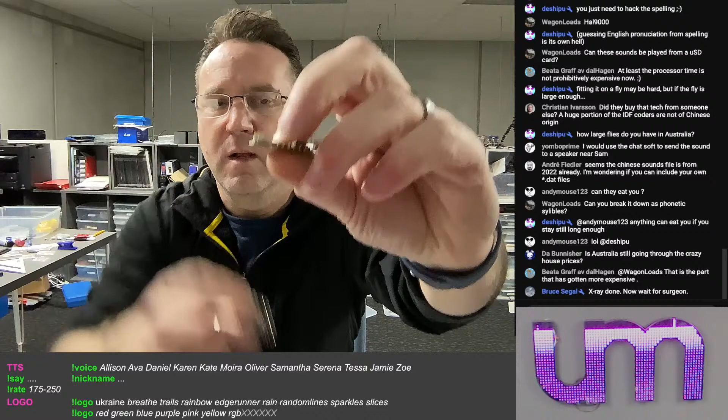I was thinking, what if I could find a cable supplier that will make me cables going from a Pico-EZmate, a 2-pin Pico-EZmate connector with 1mm pitch, to the JST, or to the Pico blade. Is there more than one size battery?

Well, JST is a brand. We call it a JST connector, but that's wrong. It's a JST PH. The one on the Feather is called a PH, it's a 2mm pitch. This Pico blade is a Molex, not a JST connector, and it's a 1.25mm pitch.

No, I don't want to make cables. I'll source the cables.

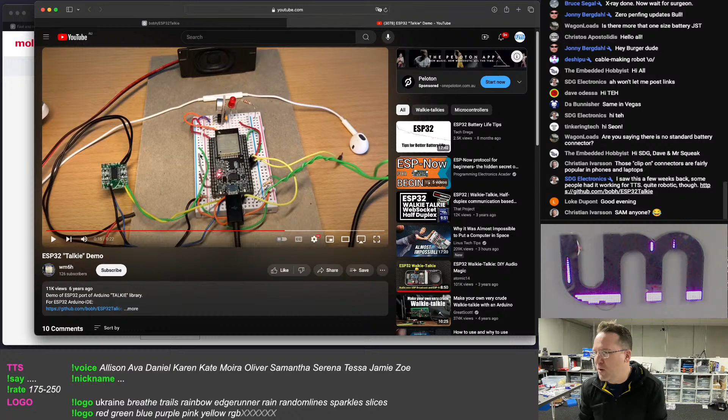So that's right, that's the speak and spell stuff. Audio output.

Oh, it's not using I2S. Well, that's a problem. Does it require the DAC?

Okay, yeah. Well, you can't do that on an S3 because there's no DAC. I need something that'll do I2S.

Oh well, you have a speak and spell? Really, I never had one. I was jealous of people that did when I was a kid, but at the end of the day, I had a Commodore 64 and I could make Sam talk. That was cool.

Dick talk even, I heard somewhere. So anyway, those are my options.

I've been looking at connectors. I found housing for these on LCSC, but I can't find the other ends, which means I can't use their cable system to find out.

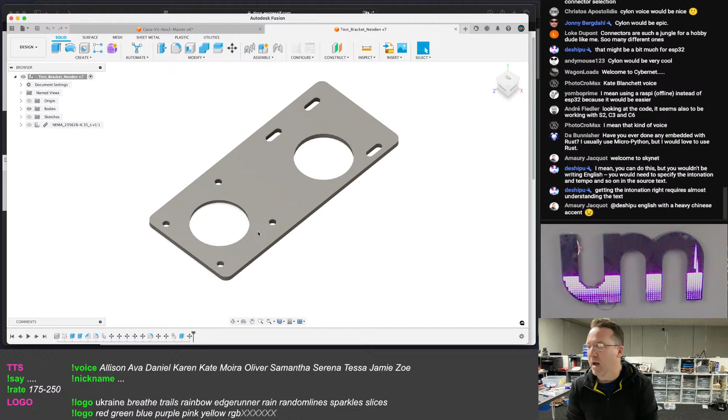Da Bunnisher says, have you ever done embedded with Rust?

No, I'm not interested in Rust. I suffer through C++ as it is. I'd rather not be coding in C++. I definitely don't want to be coding in Rust, embedded or not. So yeah, and I don't want to be coding at all, as many of you know.

Are we going to do a poll, or am I just going to start doing something? Or is there something else you guys want me to work on? Honestly, my plans fell through for my stream at 8 o'clock last night. That's when they fell through. Actually, it was about 9 o'clock they fell through. And it completely threw me, and now I have no idea what to work on.

Are you doing each spoken word needs to be recorded? Not word, each phrase. It doesn't matter, it doesn't matter. I'm not looking for a solution, folks. The solution is... Christian Ivarsson says the train says choo choo.

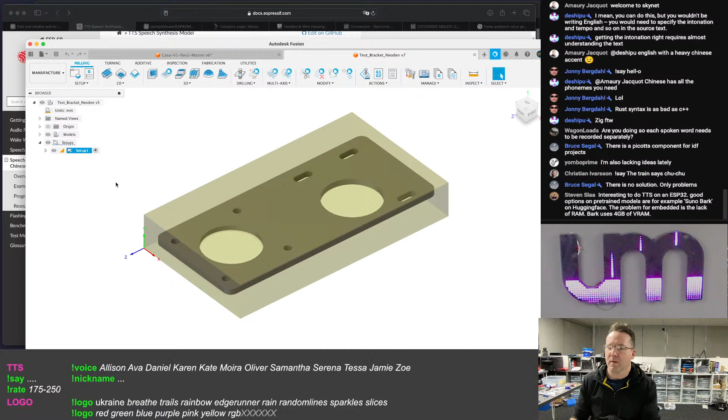Interesting to do TTS on an ESP32, good options on pre-trained models, for example. Hey Steven, what are pre-trained models for text-to-speech are you talking about? What do the models run on?

But anyway, none of that stuff's going to work on an ESP32. I mean, for the ESP32, it's going to have to be something specific. It won't be a...

Anyway, yeah, I don't want to do it by AI. Yeah, I know it's not. Yeah, none of the stuff's going to be embedded, and it'll be a large model. But that's not what I'm looking for. I'm not looking for that type of setup. I'm looking for something for embedded, which means it's something that's going to be coded, not generated off a model type thing. Does that make sense?

Like it wouldn't be using frameworks with models. It would be literally coded at the lowest level.

That's that question, Wagon Loads, is an incorrect question. That's like saying, can the ESP32 do red? AI isn't a thing, it doesn't exist. Okay, a rubber band is AI, like, you know what I mean? Like AI, you've got to be specific, not 'can AI', because AI isn't the thing that runs.

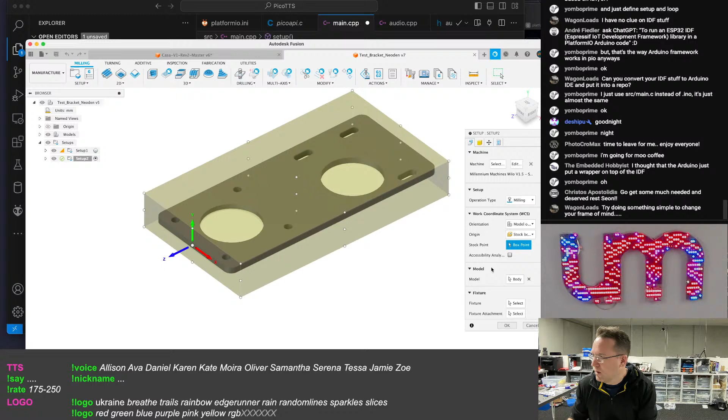Let's do some toolpaths. Or let's not, I don't know, we'll see. Let's start off with... why is my work holding not...

What? Delete. New setup. Okay, orientation.

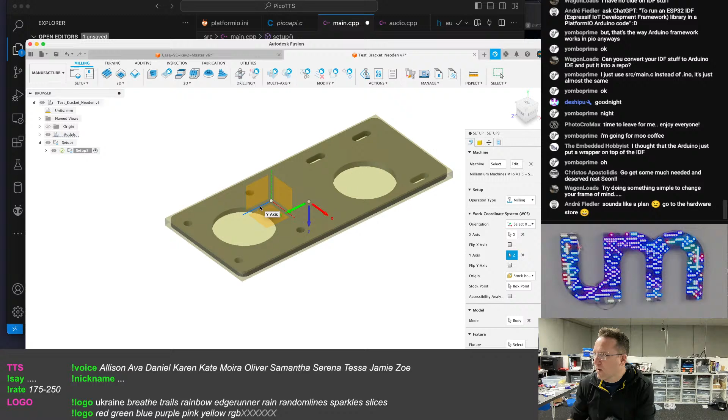Select the X and Y. Select the X, that is the X. Select the Y, that is the Y. And the Y needs to be flipped. There we go.

Oh, that's assuming I'm holding it that way. Which way am I going to hold it? No, I might have to go that way, actually.

Select the X. That's going to be my X. What? Select the X. Select the Y. Why is that not? I want this way to be my X-axis. What is it doing?

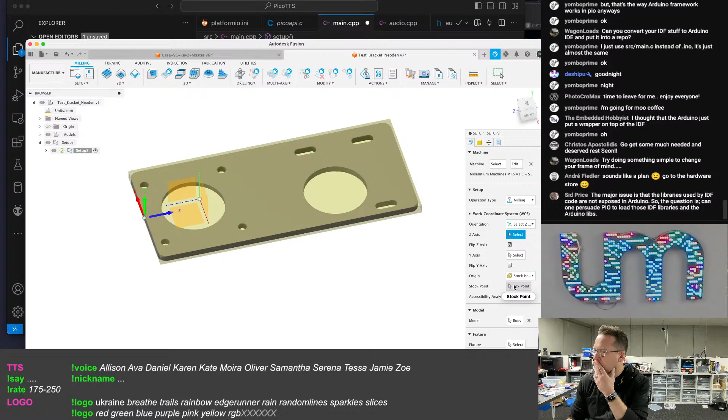Select the X and Y axis. X-axis, oh I'm clicking that instead of this. Right, X-axis is that, but flipped. And my Y-axis is that. No, my Y-axis is...

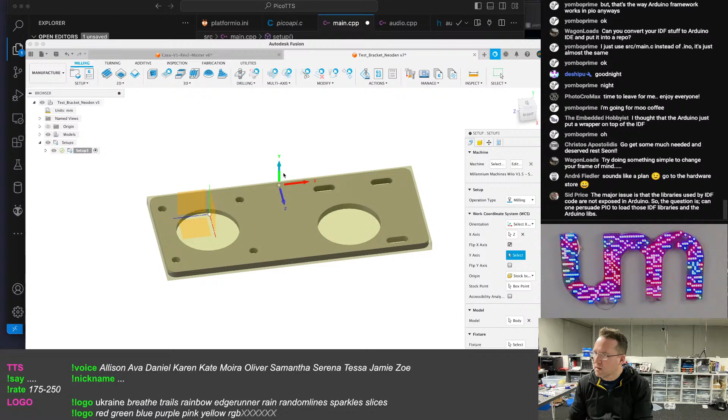Select my X. Did I click? I must have clicked the thing. Okay. And my Y-axis is that one, flipped. Thank you.

Major issues: the libraries used by IDF code are not exposed in Arduino. So the question is, can you persuade PIO to load those IDF libraries? Yeah, I don't know, I don't even know where they'd sit in the project.

Sid, that's the thing. Okay, and then my origin is going to be a selected point. Okay, that's going to be my origin.

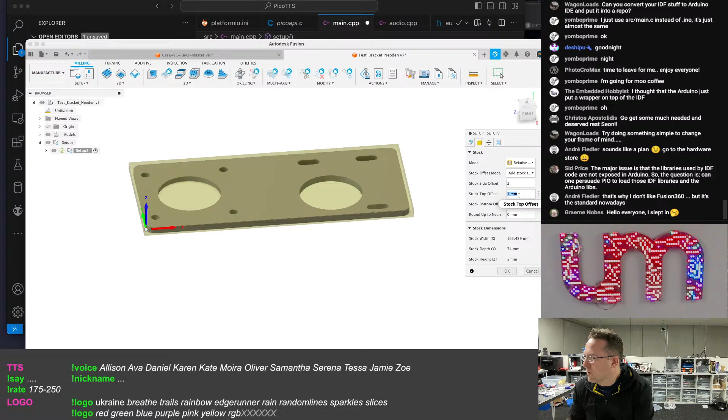And extra stock, I don't know how big I'm going to make the thing, and stock offset is 0. Top and bottom. Okay.

Which means I need my origin to be... how do I... oh, my origin, oh can't I do it on the stock box point there? Okay.

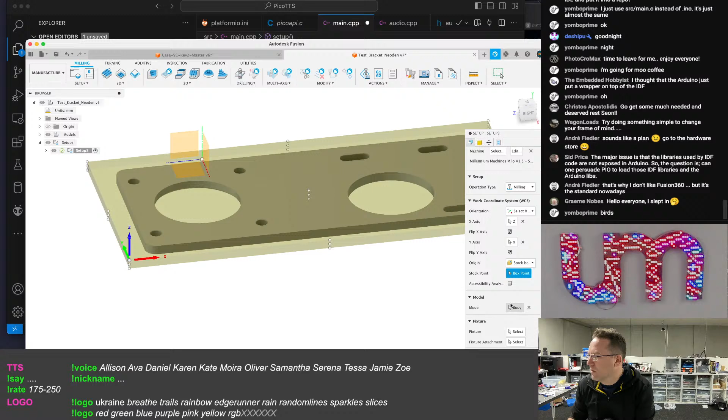Hey Graeme, how you doing mate? How's everything going?

Okay, so I want to do a bore, and it's going to be a flat end. I need a 4mm... who knows? I'll play around with those later.

Things a lot more, but Fusion is more powerful. I've never used anything other than Fusion. All the examples for the Milo stuff that I've seen has all been Fusion.

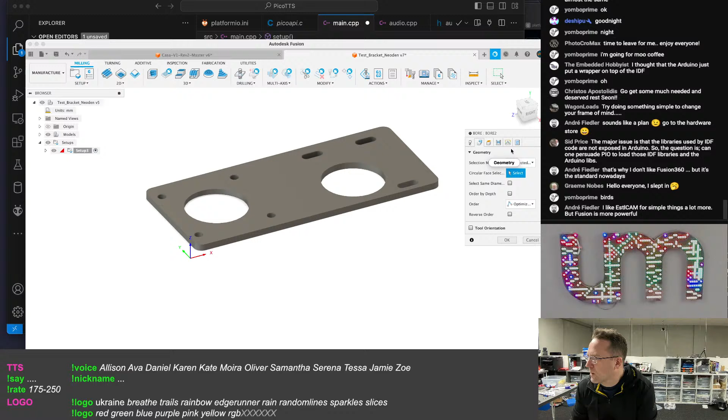No coolant, I don't care about the feeds and everything else right now. Geometry. So I'll do that one.

So my options for those, these are 5.2 millimeter. I could do a 5.2 millimeter drill. But I feel like, oh can I do it? Is that a slot?

So can I do these as a bore as well? I guess I could.

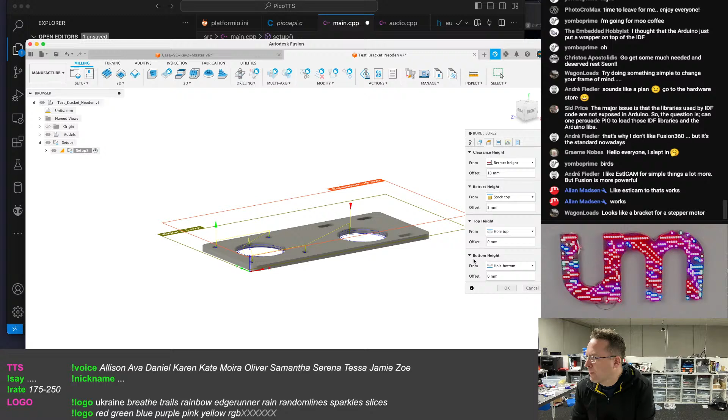Stock bottom. And it's actually got to go a bit further. Offset 0.5, no, minus 0.5 millimeters. So...

Oh, doesn't it cut out the whole way? If I do a bore, that's got to not be a bore, that's got to be a... maybe that just needs to be adaptive clearing.

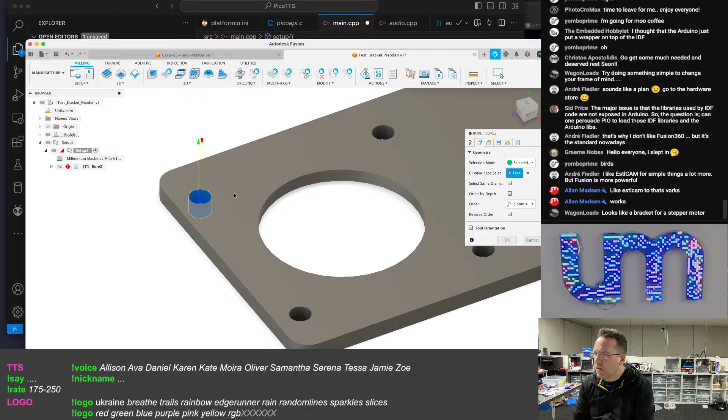See, I don't know what I'm doing, by the way, in case you all didn't know. That one. Okay. So this should slow it down.

Why is that going up? I want it to go down, bore down. Yes, this is for my conveyors, which I need to do out of aluminium, 4mm thick aluminium, which is on the way, but I don't have it yet.

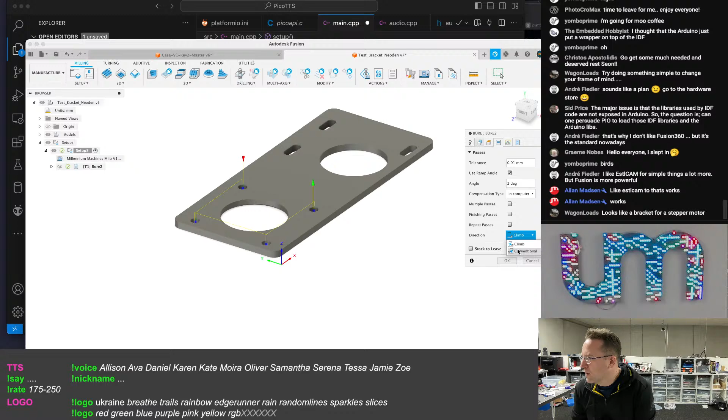Direction, maybe because it needs to be conventional. No, it's still... why would it be going up? I would assume it would go down, drill down. Is Peter around? See, I don't know what I'm doing.

Okay, let's cancel, let's forget about that for the moment. Let's do another one, we're going to do an adaptive clearing. That's going to be the same one.

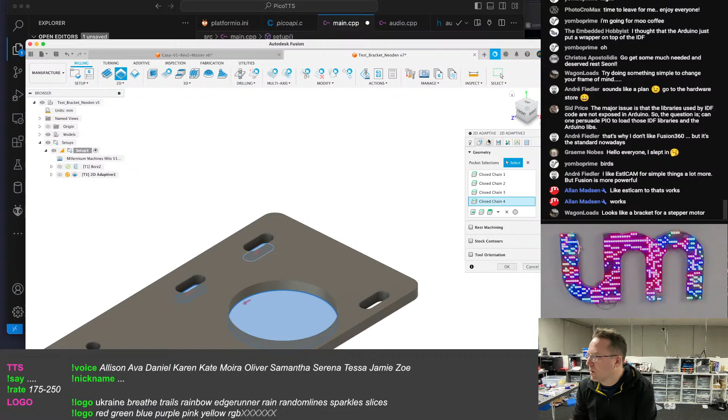And the geometry is that and that. I wonder if I can do those. And again, I'm going to not worry about... bottom is going to be stock bottom.

Spindle speed smaller than supported for this machine. Allan Madsen says the top of the plate is 0, and you are going from 0 to minus 4 millimeters. Right, so I want it to go from 0 to minus 4, not minus 4 to 0. Oh, right.

Okay, so that looks like... you see that it's going backwards.

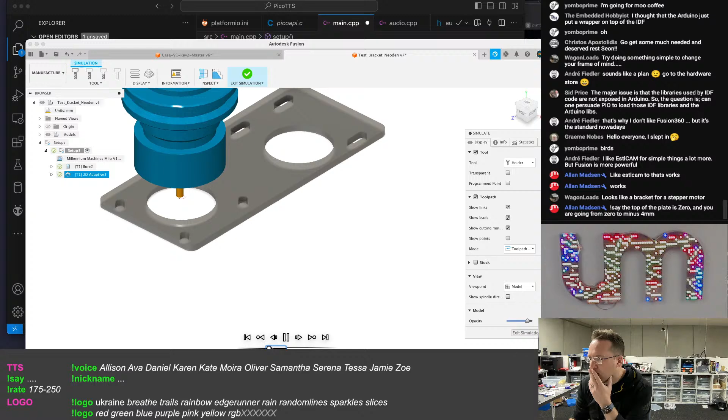Oh no, it's not. Oh, is that minus speed? I'm an idiot. So that works. I must have had it set to minus speed, so it was going backwards. How funny. Simulate. Play. That's better. Slow it down. Okay, not that slow. See, now it's going down. It was playing the simulation backwards.

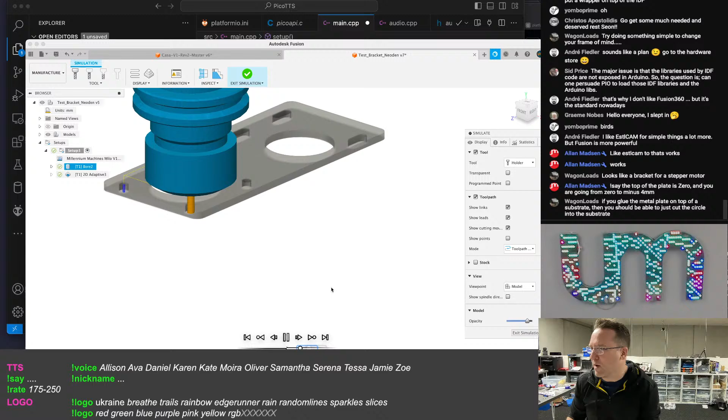If you glue the metal plate on top of a substrate. What? Yeah, I don't want to, I want to clamp it. Well, what I want to do is cut the outside edge out. I don't know how to work that one out yet. Okay, so that's working.

The question is, can I also add... Oh right, I did add that one, and that one. But they're not being done as part of it. So it doesn't like doing adaptive clearing on the slots. So what would I use for the slots? See, it's skipping the slots.

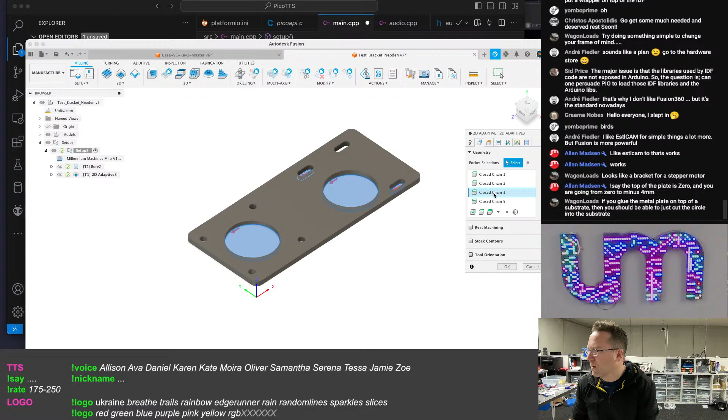So what would I use? Am I slotting the line of the slots? Is it a slot I want?

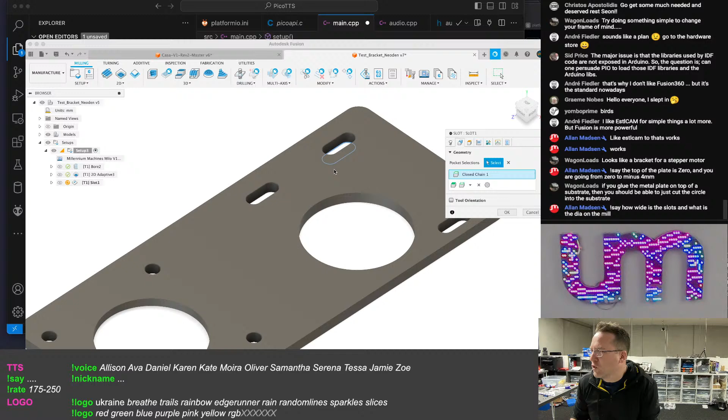Allan Madsen says, how wide is the slot and what is the dia on the mill? So it's a 5.2mm width slot and it's a 4mm end mill. I thought I could do a bore with it, but apparently not. I'm going to try doing a...

What does that do? Oh, that might... is that what I want? That seemed a bit fast. Let me just slow it down so I can see what it was doing. Okay, that might work.

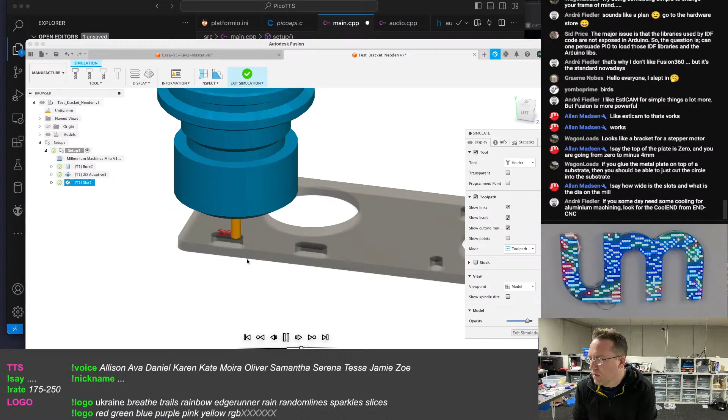So is that... but that's not going wide enough. That's going back and forwards. But that bit is not wide enough for there. So it's not a slot. I don't want a slot.

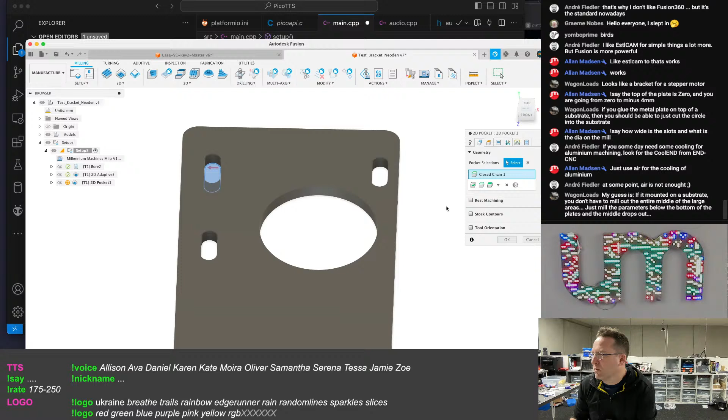Delete. Is it a pocket? Looks like it's doing the same thing. It's got no X and Y. Oh, actually it does, look, it is moving side to side.

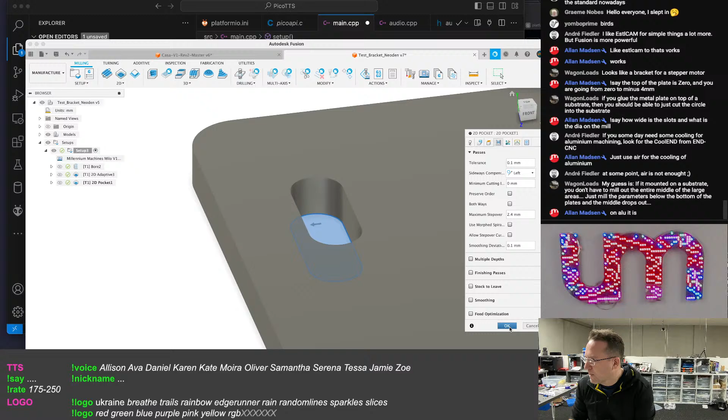But it looks like I've left clearance on it. So that's something I need to fix. Where's the clearance? Right, here, stock to leave. I don't want to leave any stock. So maybe the slot, oh, that's better. Look at that. Maybe the slot would have worked.

So do I do the same thing here? Did I leave stock to leave? I did. I don't want to leave it. I'm not going to do a finishing pass on it. It doesn't make any sense to have a finishing pass.

So the big question I've got, the one thing I haven't been able to work out how to do yet... right, so that will do all my cuts.

The question is, how do I... Geek says, greetings mortals. Save, gotta save. Hey, Quixotic Geek.

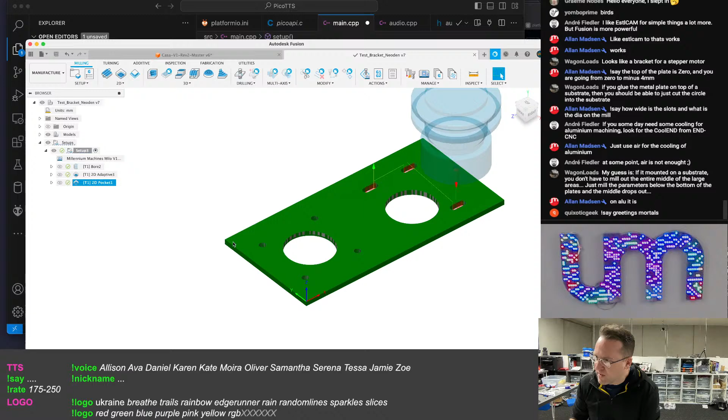How do I do the outside edge and leave tabs? So this is the outside, that's my piece, right? I want to cut around this, but leave tabs. So is that a contour? Oh, tabs. Wait. Oh. Tab width 4mm.

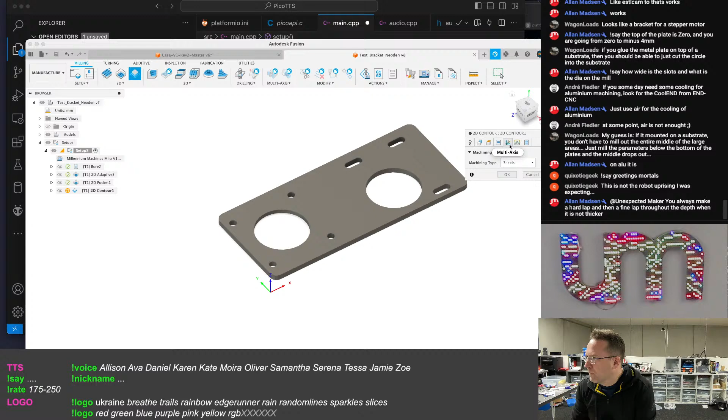Okay, just let me see what this does. Stock bottom minus 0.5. No stock to leave. Like, I'm not setting up any of the feeds or rates or anything, right? I just want to see if I can get a list of cuts. That looks promising.

Although that's dropped down way too much. So I need that to cut down. And why can't I actually see the tabs? I'm not sure if... oh, right. That's cool.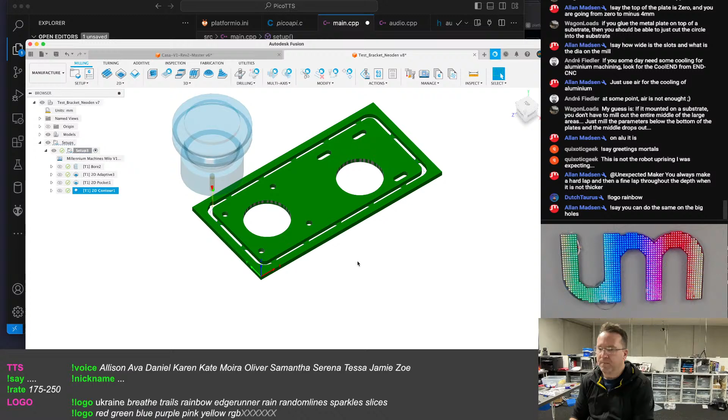I know I'd have to cut them and break them, but this way I could put it in the vise and I wouldn't have to clamp it, but maybe I could clamp it. You could always make a rough pass and then a fine pass throughout the depth, then when it's not thicker. Sure. Allan Madsen says you can do the same on the big holes.

The thing is, yeah, so I know I need to play with, like for this adaptive clearing, I need to play with the optimal load. Like that's how. No, it's not optimal. What's the one that sets the rate of cutting down? Like, it's only 4mm thick aluminium, but I can't just cut through 4mm in one hit.

But this contour, I don't know what any of these... like I've not... oh, I'm going to, is it multiple depths?

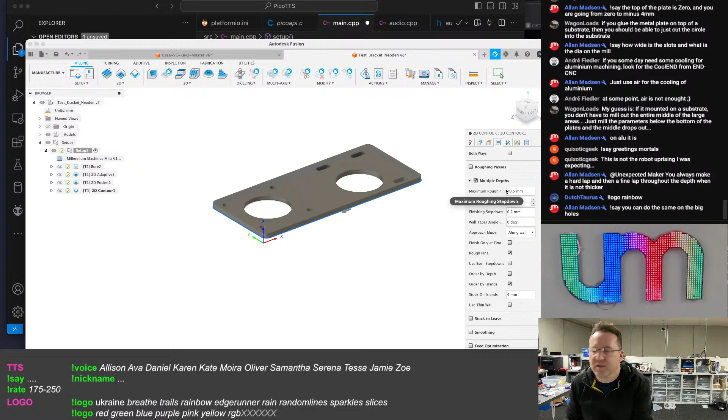Maximum step down, specifies a maximum step down between... oh, you can't even see that on the screen. Hang on. Allan Madsen says, does it have depth steps? That's what I'm looking at now. Here, so it's the maximum step down between Z levels for roughing.

Right, so that's 0.5, which is stupid. So how much do I want to cut at once? Is it 1?

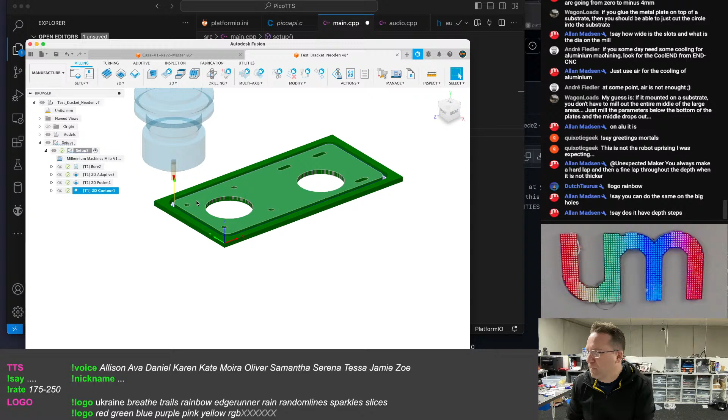Right, so that looks better. That's coming down 1mm at a time. I don't know how fast I can cut it, right?

Okay, so that's cut all that. It's going to be the same with the tabs, to 2mm or 1mm. That would be easy to remove. Sure, but I also don't want it to fall apart.

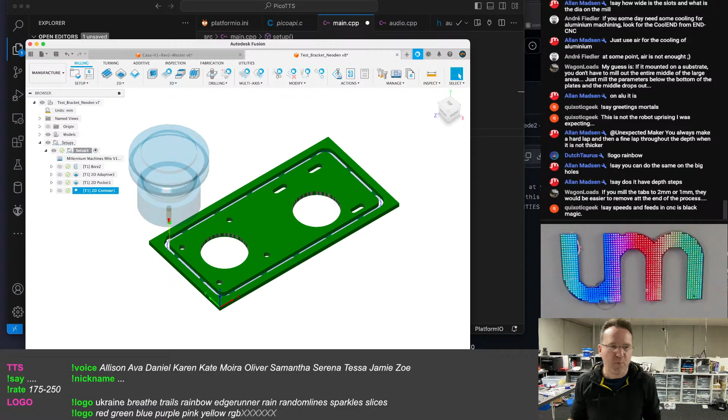Geek says speeds and feeds in CNC is black magic. I know it is, it's like RF. But this is just, I just need to do it, right? I need to try, and if I break bits, I break bits, and if I wreck stock, I wreck stock, you know what I mean?

So with this adaptive, I don't have to do the step down, I don't think, because this does a bore down first, you see? Once it's in, then it starts clearing. But my clearing might be too wide, I need to play with that.

Right, so the question is, are the tabs going to be strong enough to hold it? Most likely not.

But my other option is I need to somehow hold this onto a spoil board, and I don't know how I could hold it onto a spoil board without the clamps being in the way. And I don't want to stick it to a spoil board, and I don't want to cut these holes here and then use them to screw it into spoil board, right?

So option one is make all the internal holes. See, I didn't want to do that. I didn't want to have to stop and change what I'm doing, because I'm learning, and I'm trying to see if I can cut this in multiple steps without having to touch the workpiece in between.

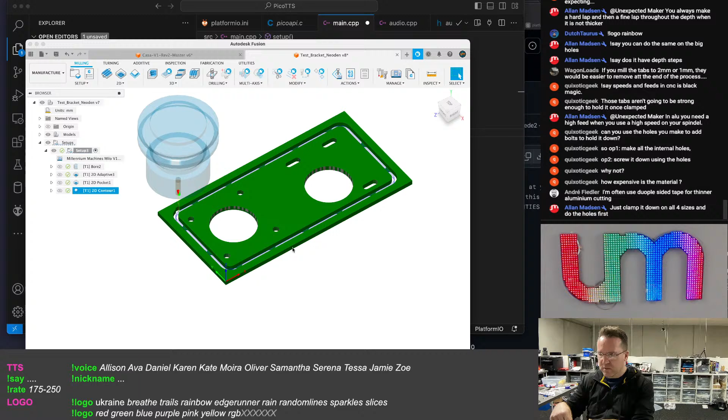It's not about it being expensive, I need to make 3 of these, I've got enough material coming. That's not the point. The point is, if I have to clamp it and cut the holes, or however I hold it and cut the holes, I then have to drill that into spoil board, screw it in, and then have to reset up my work point, recalibrate, just to cut.

Just clamp it down on all 4 sides and do the holes. But the clamps are going to be in the way. How do I clamp the middle section?

Yeah, no need to recalibrate. Not calibrate's the wrong word. I have to, well, what do you mean? How is it sitting there to start with? I don't understand.

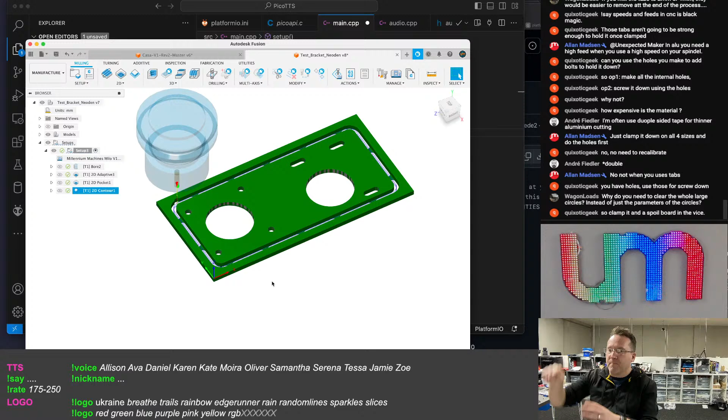But I don't have holes, so I need to drill the holes, I need to mill the holes first. But that's still, okay. So these 4 holes here, 1, 2, 3, 4, and even maybe these slots, I could use those to screw it into some spoil board, but those holes don't exist yet. They are part of the milling process.

So this has to be sitting, either clamped to some spoil board somehow, drilled, and then... Allan Madsen says just clamp it from the side. Let me finish. Mill the holes, and then put screws in to hold it down. But it's been clamped already, so then those clamps have to come off. If I clamp it from the side, then how's that different from the tabs not holding it in place?

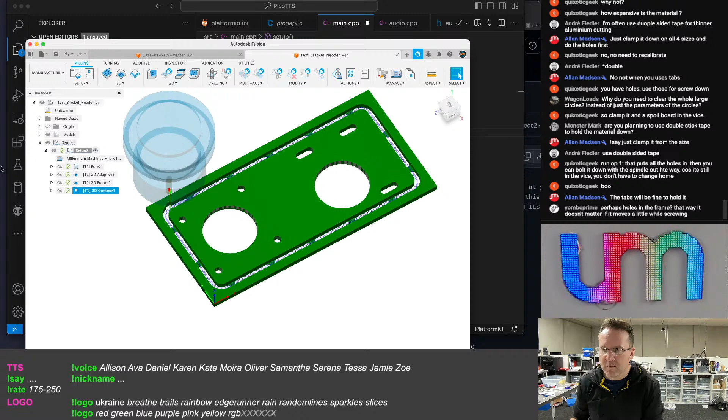Tabs will be fine to hold it. But didn't you or someone say that those tabs won't hold it? So what are the, that's a lot of tabs, is that enough? So if this was clamped in a vise, just hanging in the air with a gap underneath it, right?

Are those tabs enough to hold that in place? No, I don't have it, it's on the way, I'm waiting for it, the material. And I'm trying to come up with a way of cutting this out without changing the end mill. 4mm aluminium.

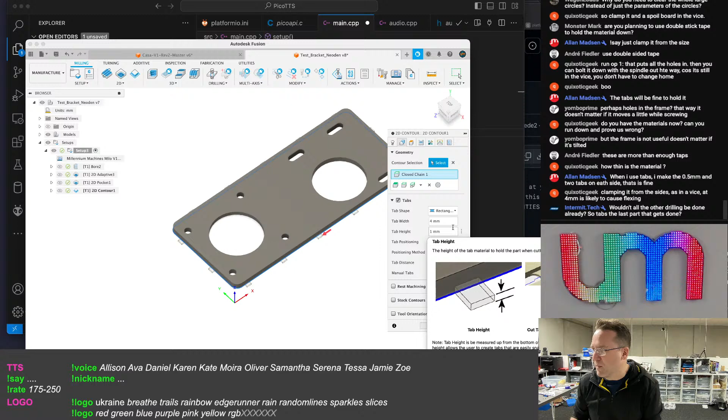Okay, well, where are the tabs? Geometry. So that's 1mm tabs. So you reckon I can go 0.5mm on the tab?

Number of tabs. Oh, I can't do that - if it's 2 there, it's 2 everywhere. Oh, I can select manual tabs. Is 4mm wide tabs okay?

Allan Madsen says, remember how far you go under the plate. 0.5mm under the plate.

No, I don't think it broke. I don't know, did it?

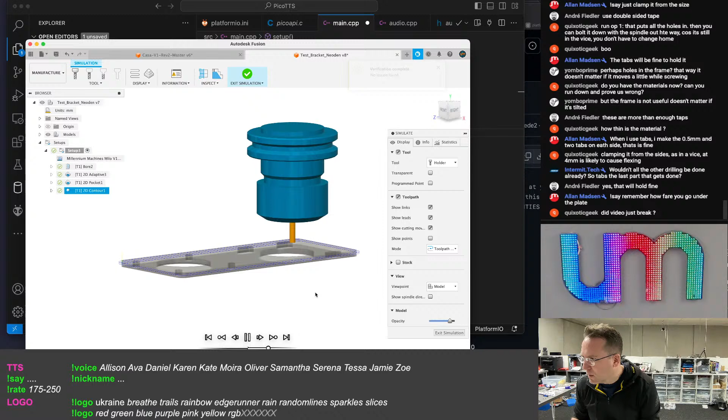Allan Madsen says then make them 1mm. Oh, is that from the very bottom, is it? Ah okay, that makes a difference. That's why they're not there now. Okay, that's why you're saying about how low. Okay, so I'm going 0.5 under.

If I want them to be 0.5, they need to be 1mm. Okay, see, I don't know any of this stuff because I've never done it before. Why is my Discord pinging a lot?

Wait, why has that only got 2 tabs now? Oh, it's per contour. Wasn't it per side? Geek says, what tolerance class are you aiming for? Number of tabs per contour.

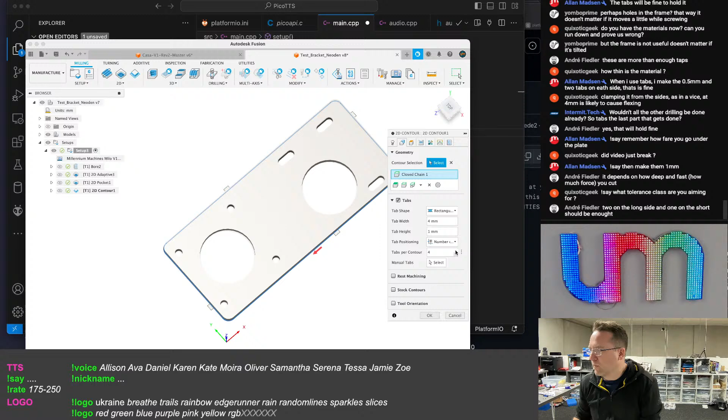So will that be enough? Six - one on each end and two on each side.

What's the tolerance class? Allan Madsen says, I am professionally trained in CNC. I am professionally not trained in CNC.

Okay, that's what I've got there. I don't know, like, so I don't have a tolerance class. Like on this, if it... like I'm not doing a finishing pass close enough. I'm not leaving any stock on the cuts.

Close enough is good enough. I don't care about the finish on the edge, really. Not for this - this is a functional part, and it'd be nice if it looked fantastic, but it is what it is.

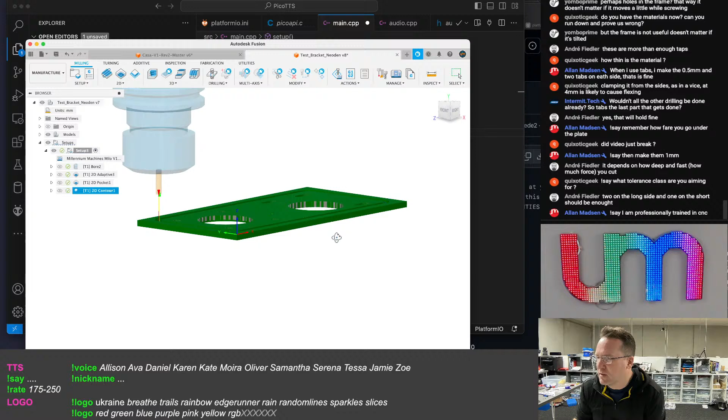So the question is, if this was sitting in a vise clamped on this side and this side, is this gonna break? Are those tabs gonna have a problem because of the holding of the vise pushing? Yeah.

Seriously, my Discord's going crazy.

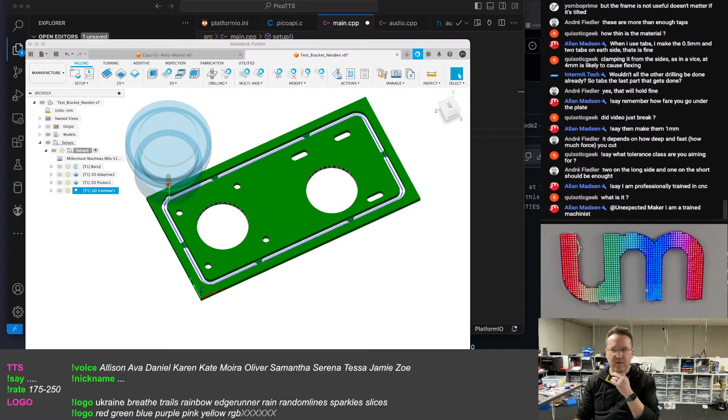Look, this looks like it could work. How do I run the whole... can I do a... oops. No, simulate - will this show me the whole thing?

Yeah, this is for the automating of the conveyors. I'm currently using 3D printed brackets like this. I mean, that looks like it's doing everything I want.

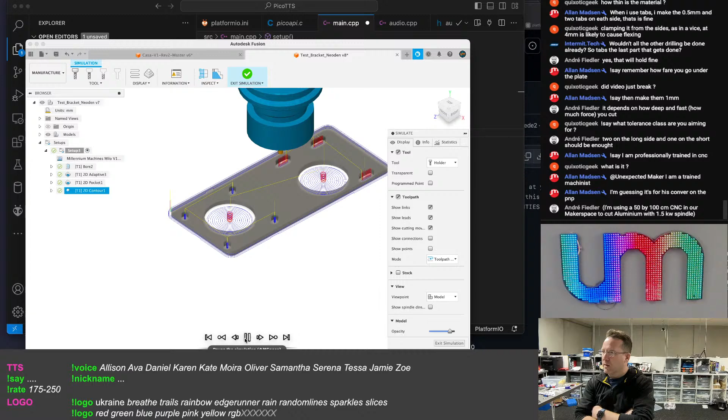I'm just going to go single flute. I've got some 2 and 3 flute end mills on the way.

Well, that's pretty close to what I'm doing here. Can the base plate have a milled out recess that the metal plate can be pressed into to hold it in place? Well, I don't have a base plate. I'd have to design and mill a base plate to do that, but I don't need to.

What I want is to be able to hold this from the sides so there's nothing underneath. I don't want a spoil board. I mean, I could do a spoil board, sure - I could pre-cut a spoil board out of wood, something thin, that's just the same size as my stock, like that.

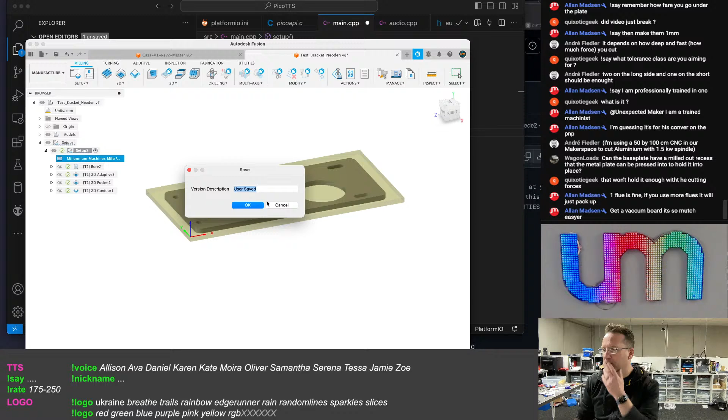Oh, it's not right. So, I mean, that's what I could do, and then at least it's got something to sit on.

Get a vacuum board - yeah, those things are for later. Like, air and mist is for later. Everything right now, I need to finish the case, which I'm getting close.

And I want to be able to do a test cut. I've got some 3mm stock here, but it's not cut to size - I need to cut it down first. It's an odd shape and it won't fit in my vise, it's not square or rectangle, you know what I mean? So I don't really have any tools here to cut it down.

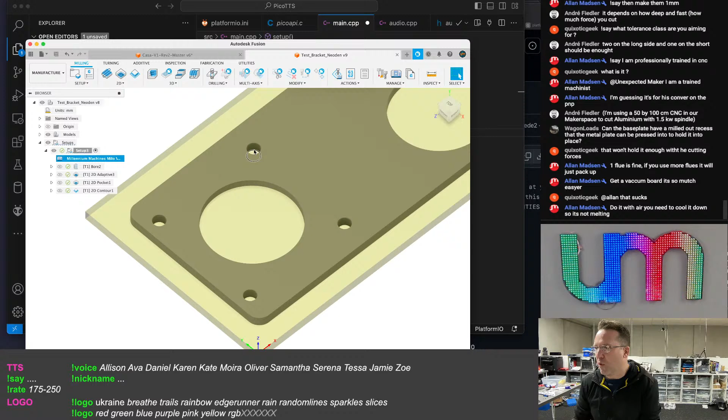So are they the correct operations I've done? Like, I'm doing a bore rather than a drill here because I didn't want to switch bits. So I'm doing a bore on those 4, adaptive on the inners, pockets for these - yeah, pockets for those, and the contour.

I don't have air, so I can't do it with air.

Right, I got to be careful. Yeah, I got to be careful with the bits not ejecting on higher flute count. Yeah.

Yeah, I saw that app. Someone posted on the Millennium Discord about that app, which looks really cool.

There's nothing I can do about this getting hot. I have a compressor, but I've got no way of... I've bought parts to make an air thing, but they're not here, they'll be weeks away still. Then I have to build something that attaches to the side of the spindle mount and have that point down. I don't want to wait 2-3 weeks for that to come and work out how to put it all together and install it before I can do my first cut.

At the end of the day, no, the robot cannot hold the air nozzle in place.

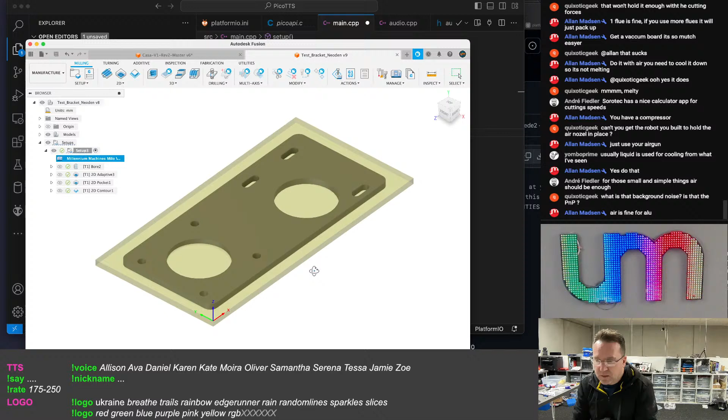No, that's my printer printing. Because I've been printing so much ABS and ASA, the whole printer has got so much dust. I spent like 2 hours the other day cleaning down the whole printer, the carbon rods, the steel rods, the threaded rods, cleaning them with IPA and re-lubing everything. But then I printed another 2 or 3 reels of ABS since then, and because it's a volatile material, this stuff just goes everywhere, so I need to re-clean it all out again. But I'm just waiting for this stuff to finish printing first.

Can the workpiece be mounted in a larger... No, it's not the workpiece that's the issue, it's the bit, it's the end mill. Yeah, it's not the workpiece.

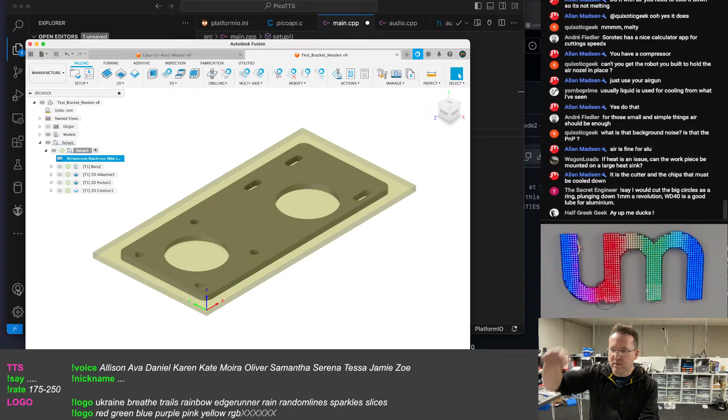The Secret Engineer says I would cut the big circles as a ring, plunging down 1 millimeter a revolution. WD-40 is good for aluminium. What do you mean as a ring? These are going in as an adaptive, so they're going down in the middle first and then cutting around. Like how else would you do it? Or are you talking about just cutting a ring and leaving the center?

The robot's unfinished in my front room because I had to move off it for a bit and build my mill. I spent the last couple of weeks building my mill, which is built and working, and I'm just finishing up building the enclosure for it right now.

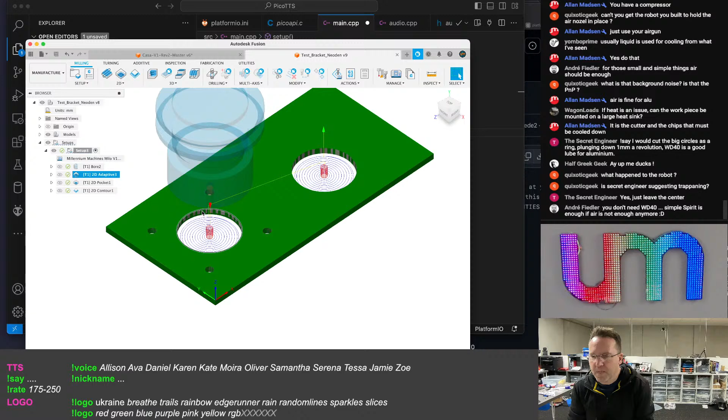I don't know what trepanning is, but if I leave it, the center's not going to be held down. So what's going to happen to it when I'm cutting it? Where does it go? At some point, as the cut's finishing, it's just going to fly off somewhere, right? That's not what I want.

Very confused. The last Aussie machinist video I watched was making their own files. Making their own file, doing what? As in their own toolpath files. I'm not doing that.

Hello, half Greek geek. It's like a 3,000-year journey.

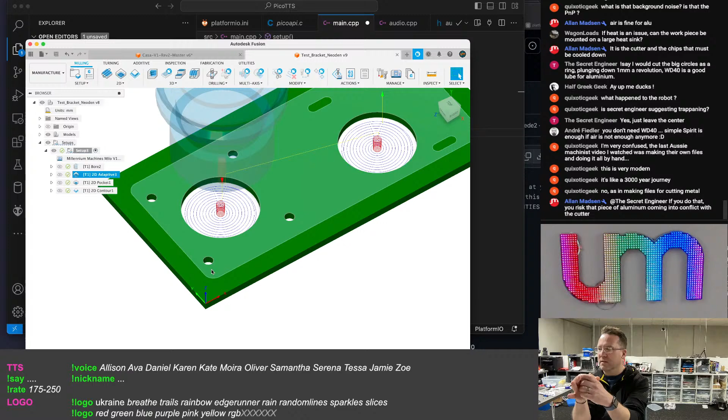If you do that, you risk the piece of aluminium coming into conflict with the cutter. Yeah, I don't understand what would happen to that hole, to the disc. I'm pretty sure this stepping is way too much. My optimal load... is it optimal mode? What's my cutting radius?

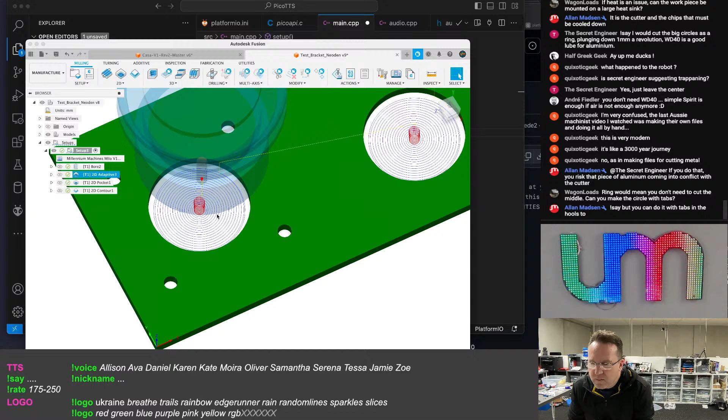If it's a 4mm... Allan Madsen says you can do it with tabs, yeah, in that one, holes too. Yeah, but then I've got to somehow get them out and clean them. I need to somehow break it out, and then file and clean the insides. I'd rather not do that.

Here you go, this will do it slower. My stepping, I think, was too much before.

I don't care how long it takes to cut them, I'm not making hundreds or thousands of them. I don't care how long it takes to cut, other than the end mill being hot for a long time. They need to be round, there are steppers mounting on them, so those holes have to fit the guide on the stepper. So they're going to be accurate, or hopefully be accurate.

If you're clamping from the side, then you may not have a flat surface because it will bow under pressure. Which way will it bow? You're talking about the material bowing this way, because of the pressure from the clamp?

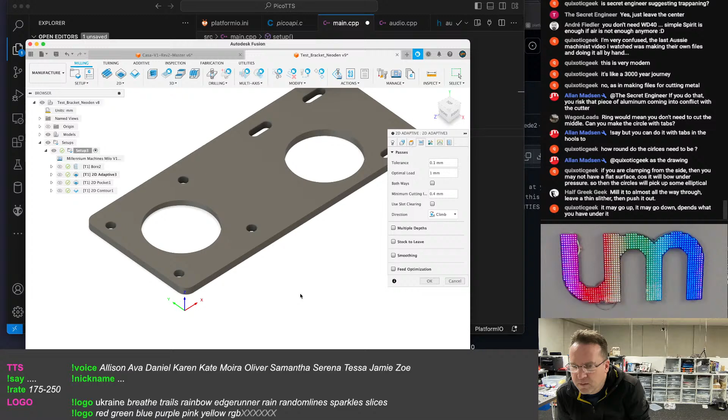Well, I was planning on having nothing under it, but as I said, I can put a bit of, like, some 2mm ply or something to sit underneath it.

You press on the top edge and down. What?

Well, it can't be worse than 3D printing it. I'm more worried about the actual tolerance of the machine cutting the hole the right size.

Oh, 10mm - why 10mm? Why do I need a 10mm spoil board? If I'm only cutting 0.5mm past the bottom, why can't I have like 2mm? I'm happy to have an air gap - I was going to leave just an air gap. Right, for the support, but it's not going to be attached to the spoil board, so that's not going to help.

I don't know, I'll have to try it. These are all learning things, right?

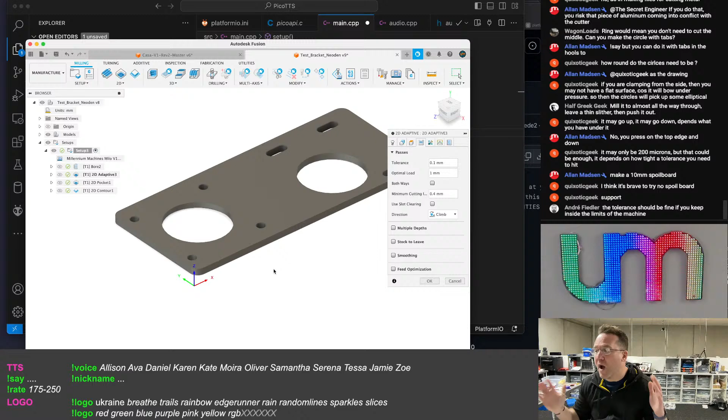No, I meant the tolerance, like the size of the circle. If the circle is slightly undersized, for whatever reason, because the millimeters per step setup, or whatever else on my machine is slightly out, then it's going to be the wrong size circle, and that thing won't fit in.

Oh, the other thing - I'd love to do a chamfer on all the edges, or at least the circle. But the chamfer's got to be on that side, that's the side the stepper's going to be on. See that? I've got a chamfer there anyway on the 3D model. But I don't want to have to flip it. I could flip it to start with, and then I could do a chamfer.

I know the chamfer would be second op with a tool change. Yes, I know. Which is why, for now, I don't care for the first cut.

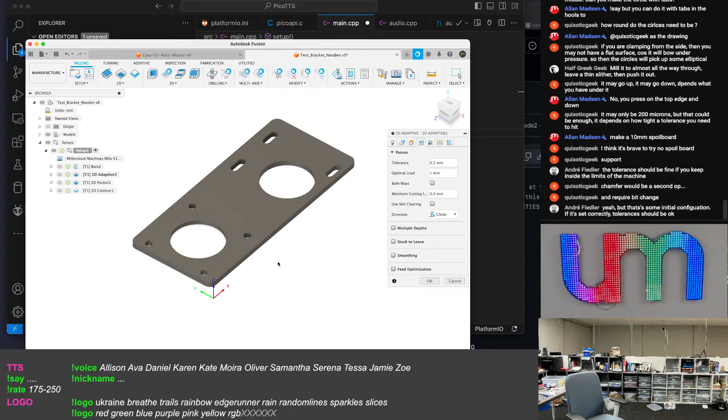Hold on one second, I'm going to see what the printer's doing. Okay, it's printing fine, it's just being super noisy for some reason.

That's some initial configuration, if it's set correctly. Well, I've only done one cut with it so far, and the size of the shapes that I made were very close, but weren't exact.

It says chamfers are what separate us from the animals. Yeah, I love nice chamfers on metal, they look great, but...

What is that supposed to be, Allan? I don't understand that.

Now I've got to work out how I can anodize them. That's the next thing - I don't need these anodized, but how cool would that be if I could?

Does not watch. What is Blondihacks? No, what was I supposed to have watched?

Anodizing's easy, put a tush in it and let it... What? Put a tush in it and let it draw it first. What? What does that mean? Yeah, hang on, Quixotic, go for it.

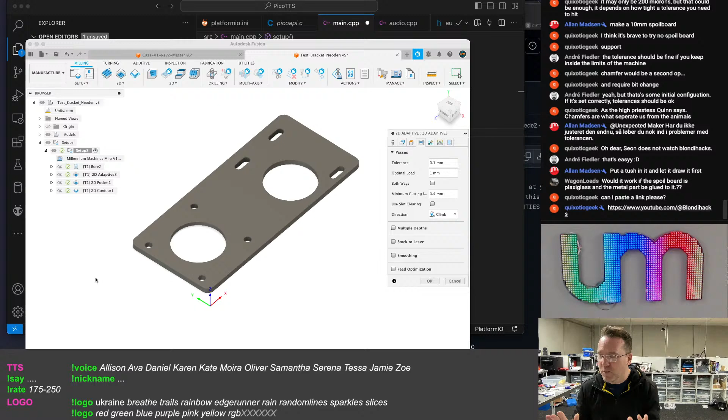Yeah. You can draw like a 100mm line and a hole. I don't understand what you're referring to though. What does that mean? Like draw on what? Why? What am I doing? Can you explain what you're trying to explain to me?

So is this all machining stuff?

I've been watching so many videos and channels on milling and stuff that honestly this is just making me get all anxious now. I'm getting all anxious.

Right, I need to go through the setup process again, where it calibrates it all.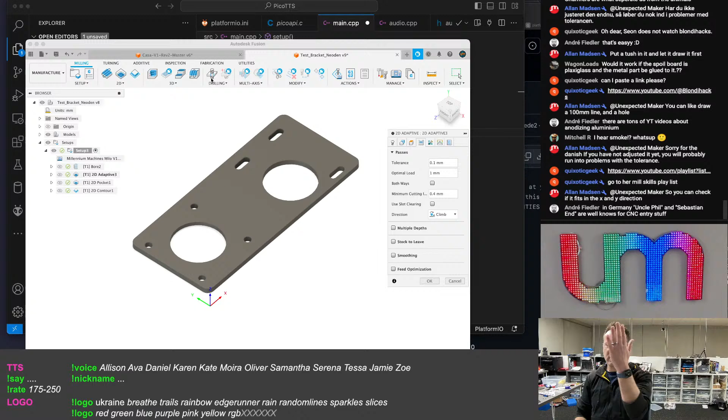There was just a couple of, as I mentioned on my video, the 3D probe wasn't calibrated concentric, because it wasn't pointing directly perfectly down. So as the head spins, it warbles, right? Which means when it's doing its measurements on the 1-2-3 block to set up the measurements of the machine, there's a chance that if that head turned at all, it was out with its probing. So I need to do that probing part again. I need to work out how to calibrate that, and then do that probing part again - tilt and nod of the head.

Hey Mike, I just did a toolpath for cutting out the aluminium brackets for my conveyors, for the conveyor mod I did.

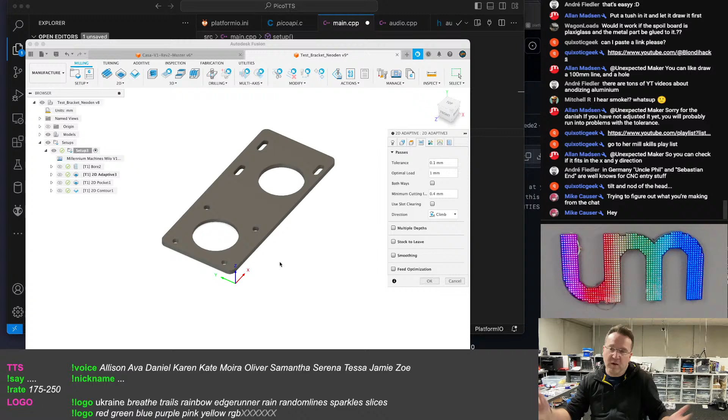There are so many CNC and milling channels, and the number of videos on the topic - because I've never really looked before - is just overwhelming how much content there is on this topic.

I could also cut this with a piece of wood to start with. I could go get some 4mm ply, cut it down, stick it in a vise and cut it and see what happens. Make a bit of a mess.

So I bought a whole bunch of stuff. I bought a whole range of end mills, including some nice quality ones, and then a bunch of not so nice quality ones that I can just destroy. I bought a bunch of aluminium stock. Geek asked, did you buy enough end mills? Yeah, well, no, there's never enough end mills.

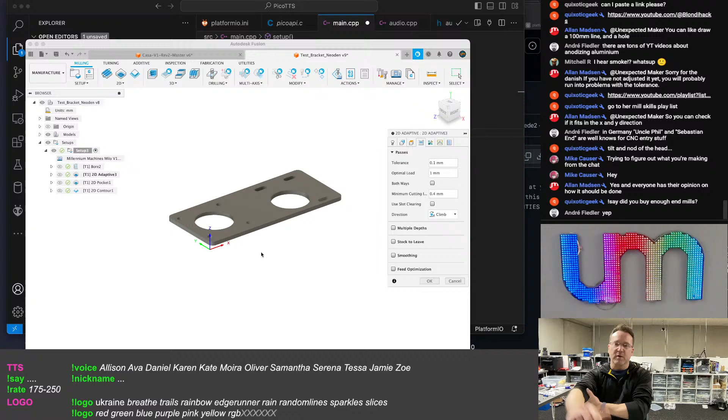But I bought some really good ones locally, which should be here today or tomorrow. Geek says wrong, you can never have enough end mills. Right, tongue in cheek. Yeah, but I bought some from China, from Ali.

I bought like, oh here's an end mill, a single flute, 5mm, whatever. I bought 10 of those, and then I bought 10 of a 4mm one, and 10 of a 6mm one. I don't know how good they are.

If I need to buy more, I will. You can get end mills from everywhere, but I bought some more expensive, nicer ones from a local place. Yeah, I'm sure I'll break a lot and ruin a lot of stock.

So anyway, I bought a bunch of aluminium stock. Well, not a bunch. And I also bought some ABS, black ABS stock. I figure ABS would be a good thing to do practice cuts on.

If I have a bit of ABS stock that's 4mm thick, the same size as these things, I could run it on the ABS first and see what happens before I commit to doing it with aluminium.

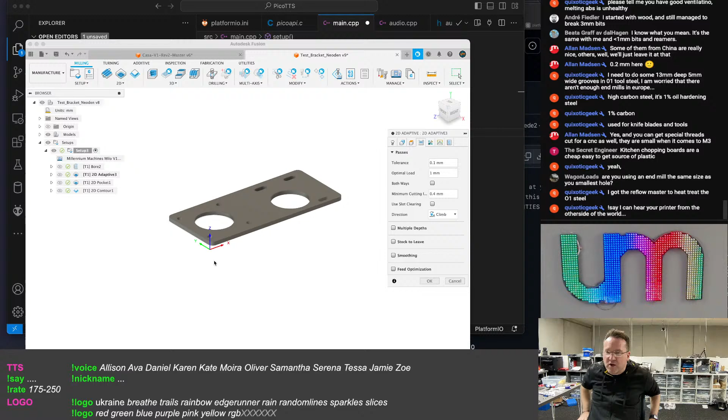Geek says I can hear your printer from the other side of the world. Yeah, through my microphone. So you got it to heat treat the O1 steel and it worked out okay? That's cool.

I mean, I could always print a block of ABS. What is it? Hold on one second. Something keeps flashing on the screen of my printer.

It keeps flashing white and then turning off again. Well, I hope I don't have to replace my printer.

That's awesome, can't wait to see it, Quixotic Geek. Allan Madsen says yes, and you can get special threads cut for a CNC as well. They are small when it comes to M3.

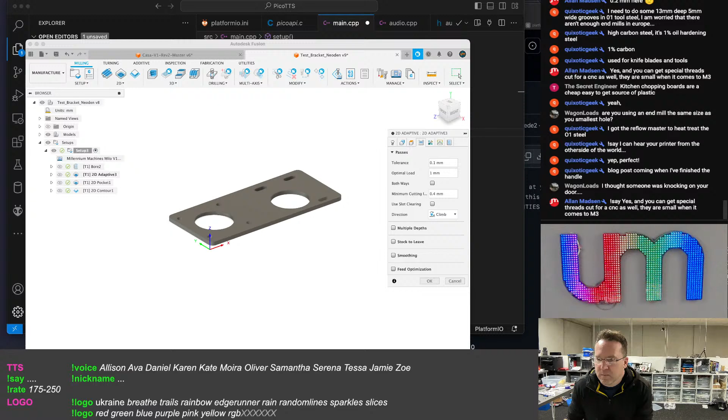So, how do I anodize? Oh my god, can't even spell. Oh, I could just get someone else to do it for me.

I don't know if I want to go through this, do I? Hey Lockie, morning. Anodizing: 1, Collins in Blackburn, or 2, buy a Caswell kit for around $700, or 3, talk to someone who has the kit who can hook you up.

Yeah, it was just to play with. Like, I'm not spending $700. Yeah, I'm not going to spend $700 on it. Didn't really want to pay for someone to do it, but oh, look at that though. Look at that.

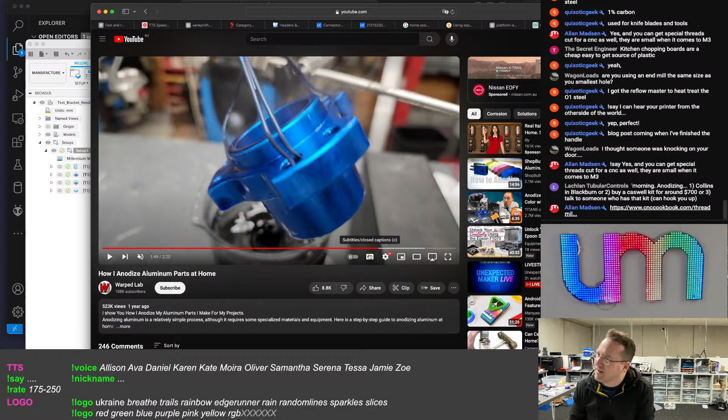Oh, I love it, that is just so cool. I loved anodized aluminium, it just looks awesome. If you don't care about colour, you might find local anodizers can put your parts through when they have spare capacity. Yeah.

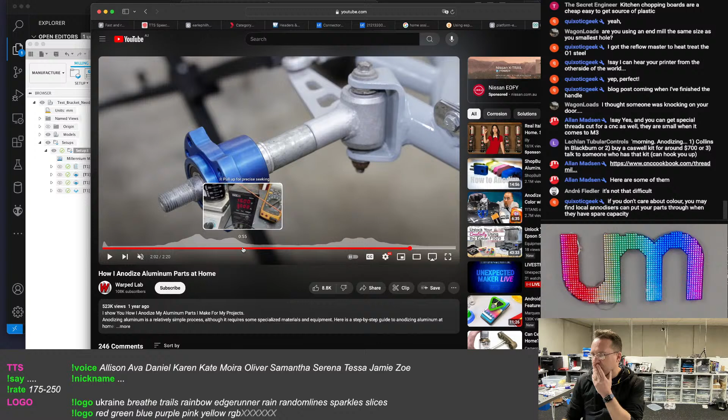It's just electrodes in some solution, right? Acid bath: 1 part battery acid, 3 parts distilled water, at 75 degrees.

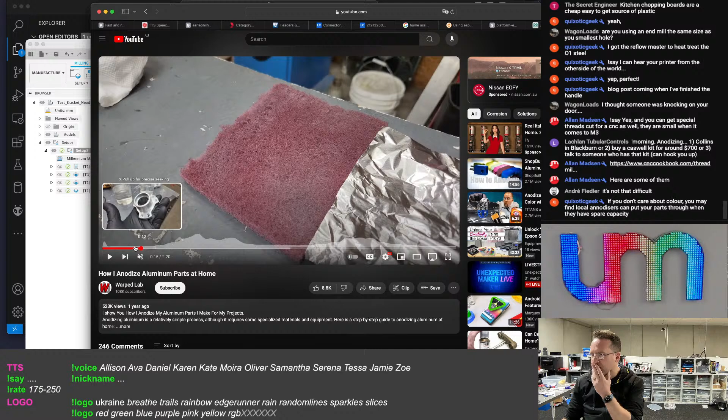Oh, I'm gonna have to watch this later. So how do you get the colour? Is it dye, or is it a particular power that sets it to a certain colour?

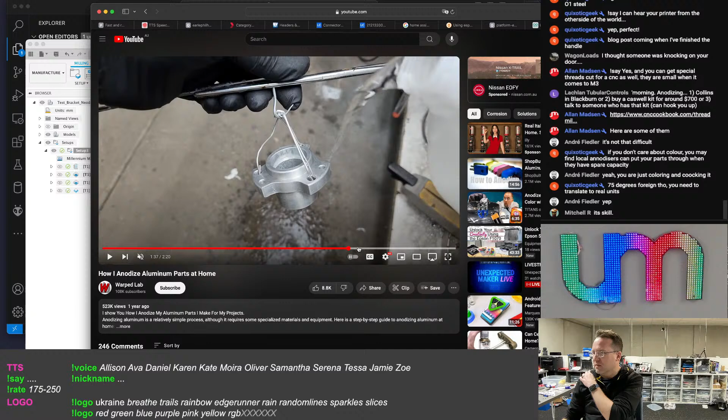Dye bath, right, so there's a particular type of dye. Right, and titanium is voltage.

Like food colouring or clothes colouring, hair colouring? Or is it a particular type of dye?

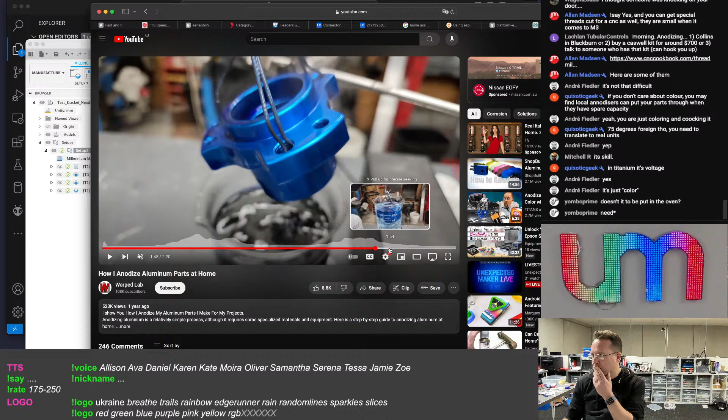I don't know, he didn't put it in the oven. And how long does the process take? Like how long, what does this say? Neutralizer, 1 tablespoon - oh, that's after. No, that's before.

In telescope making, they put vaporized aluminium onto a polished glass surface. Vaporized aluminium - what does vaporized aluminium mean? Is that what they...

Jesus, I can see myself buying a new printer. Vacuum deposition.

Black oxide coating - what's black oxide coating?

If all I need is some chemicals and some beakers, honestly, right? Like I might give it a go just to see. At some stage I might give it a go, because, you know, I've got nothing else to do with my time.

Didn't know you were close to... Yeah, you can all joke about it, but I'm actually worried that - that's not a good sound at all. So I'm a bit worried.

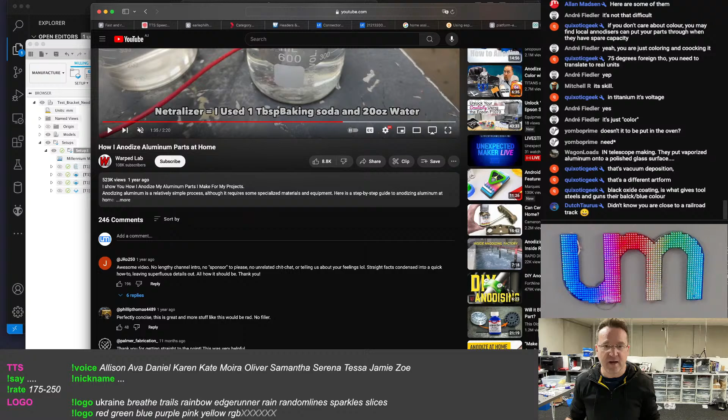Okay, I think - well, I was going to end the stream before and that didn't happen, but I've now got a working, hopefully - oh let me just make sure it's saved again. Save. I might have a working toolpath to cut something with.

There's not much chemicals at the end. You just have to open the pores of the aluminium, put in some colour, cook it, and close the pores again.

Yeah, the way you stop it from making the noise is you pick it up and you throw it out the front door, and you get a new one. No, I'm kidding, I can't afford a new one, but I've got a lot of stuff to print still, and I don't like the sound of that printer at all.